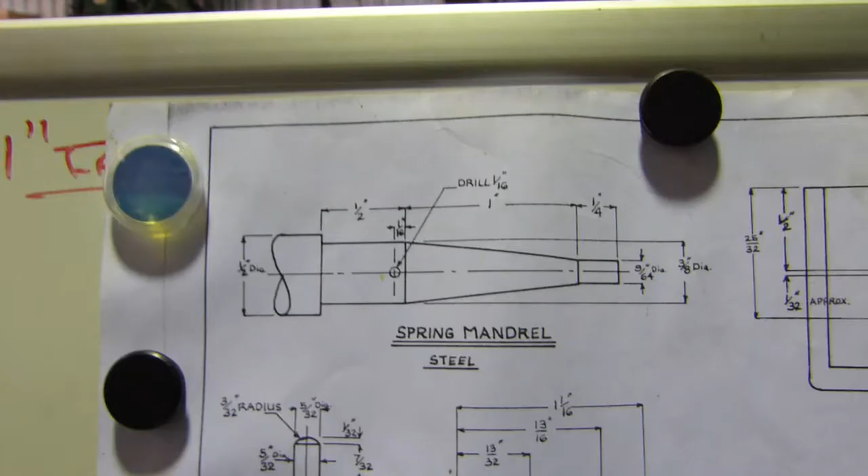Done to the head so far is the valves, so now it comes time to make the valve springs. Now there's the plan for the valve springs.

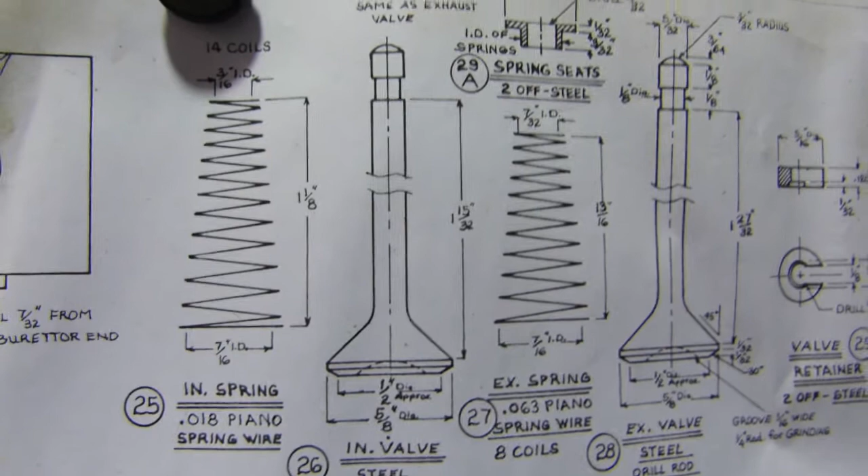They're a tapered spring, the exhaust's tighter than the inlet's. An atmospheric inlet, so the low pressure area in the cylinder pulls the valve open. It doesn't actually have a push rod or a rocker doing it, whereas the exhaust valve has a rocker that actually opens it when we need it to.

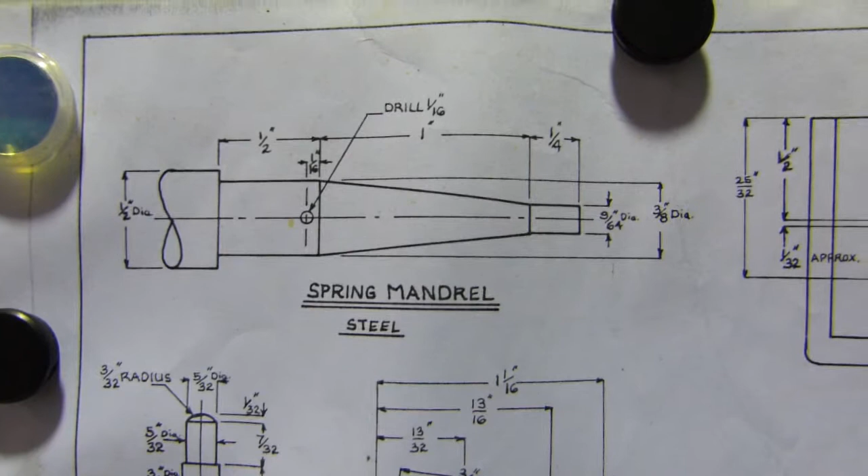So back across here, to get that done, there's a mandrel we need to make. So we're just going to turn the mandrel up, and we'll have a go at that this morning.

Well, this is going to be the mandrel for bending the spring on, or forming the spring. What we're starting with is just a little piece of 1/2 inch bright bar, and we turn it down to 3/8. Then we have a 1 inch long section with a taper that comes down to 9/64. So the whole thing's only about 1 3/4 inches long.

Yeah, it's very small, so I've got the little diamond tool out again for a bit of a laugh. We'll just do a bit of machining and try to get it close to spec.

We'll see how much I can zoom you in and still keep focus. Looking good. So 218. Zero the DRO. So if we go in 9, we should be right on 2.

This is just another little thing, just trying to get it to zeros early and just going for a mark to see if we can hit it.

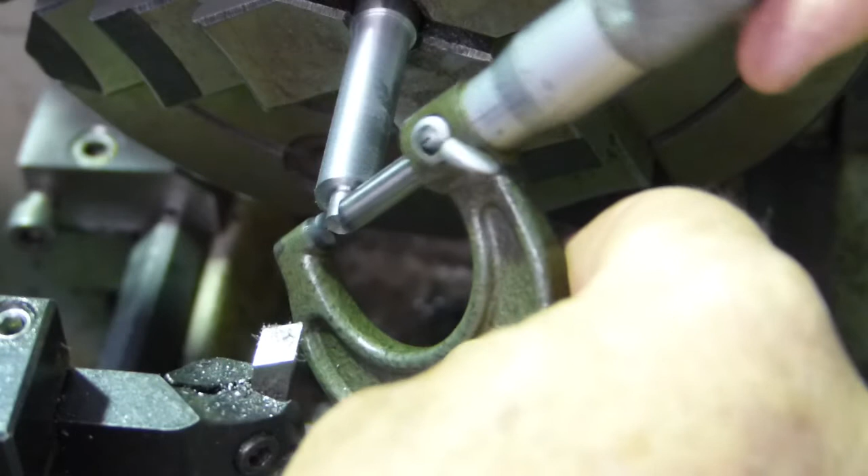Watching Ray from Razorworks, and we were just talking about this the other day. They're just going to hit a mark just for no real reason. Oh, look at that, boys and girls. Anyway, we're right on the money, not that you could bloody see, I could be telling you anything.

Okay, so 60 thou to go. If we go into 1.406, 60 roughly. So we're going to go half of that, nice and gentle though. Actually, we might go the whole hog, bugger it.

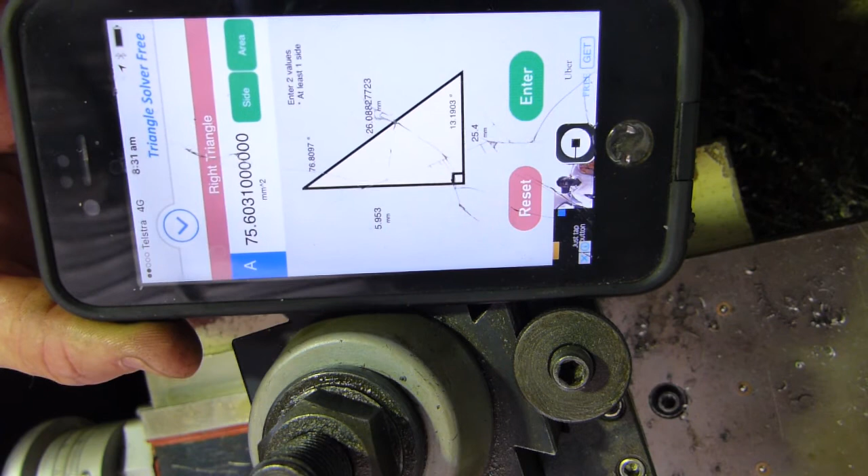Look, I went and done a heap of maths. Well, actually I just popped the figures into my iPhone app. And it tells me that the angle for the taper here should be 13.1903 degrees, and of course the compound on my lathe gives us exact 13 and a bit, so we're going to go with 13 and a bit.

Now with this setup we actually need to run the lathe backwards to try and get that angle. We have enough room that when we go the full length of the cut, we have room up in here, so we're nice and safe to do that.

I've got a little bit of steel there, the main reason's just so you have a background to look at, which I thought it was a bit hard otherwise. So I'll just start doing this. See what you reckon.

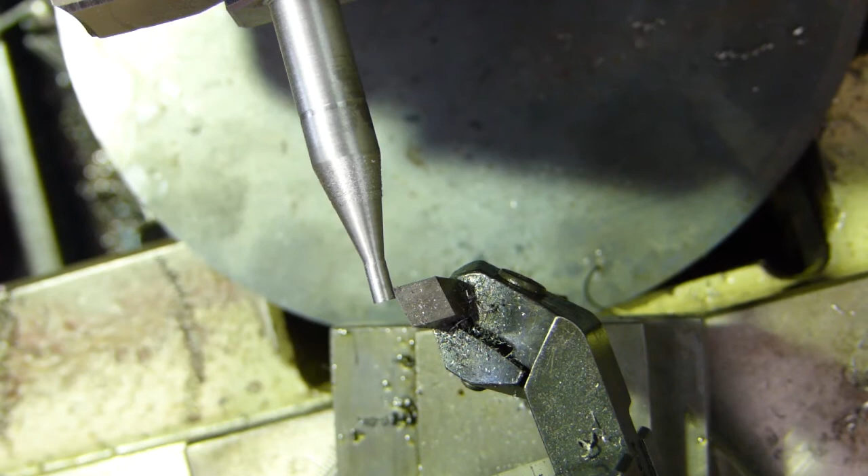Okay, Bozo has been here, Bozo lives here, I think he got a little couch in the corner. But you'll notice this mark here, this little line I put in earlier, that's the length of the taper. When we're down this side equal here, the taper should go right to that mark, and it should actually go past that mark because we're still not at 3/8 there yet.

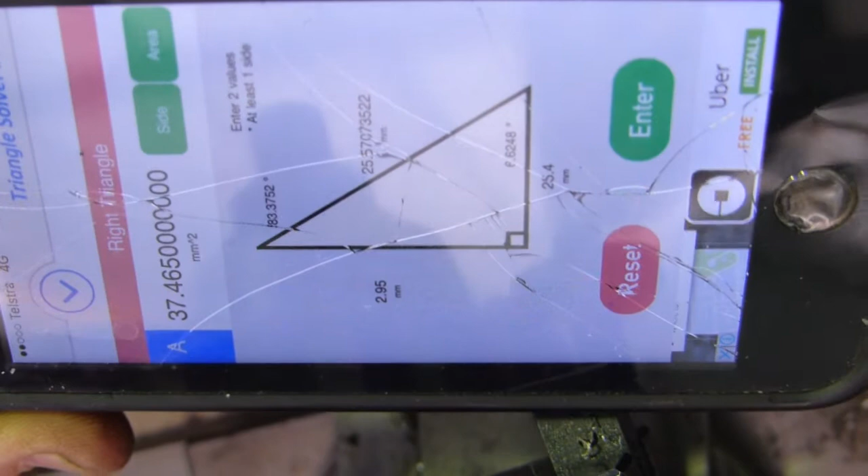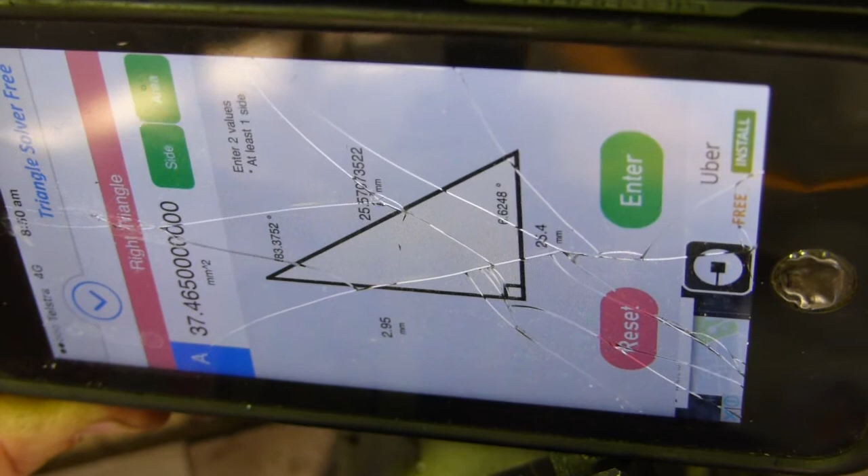So I looked at that and thought, oh, bloody Bozo's been here, I better go check. So my very accurate app, it does work if you put the proper information in. You'll see this little fella here, I actually forgot to halve it, working off the centre. So instead of 13 degrees, that shows me I should have 6.6248 degrees. So on my very accurate lathe, I'll set it exactly to 6.6248 and a bit, or thereabouts, and we'll have another crack. I'll be back in a minute once I've got the compound set.

Okay, I believe I now have the compound set correctly. I told Bozo to piss off and go have a cup of tea, leave me alone for a bit. So that is one advantage of putting in little reference marks to see how you're going. We'll gnaw away at this for a little bit.

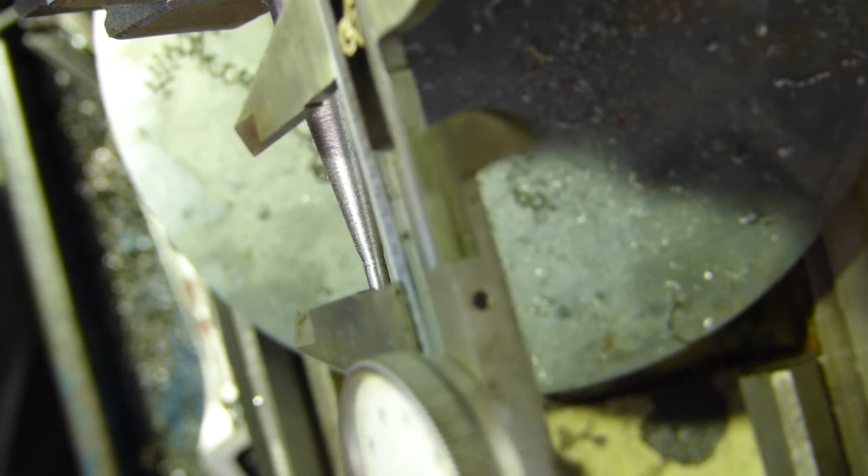Right, that looks a bit more to what we're expecting. I'll try and get this right out of the road for the moment. So when we come up from the end around 1.25 inches, 1.250 thereabouts.

There it is there. So somewhere around there, we should be about 0.375, around 3/8 of an inch. Oh look at that, beautiful. For that rough measurement, it was lovely. Alright, we'll set up and then we'll bring this piece here down to 3/8. I might give that a bit of a polish too, looks a bit rough, doesn't it?

Okay, new camera angle, and now we're going to bring this down to 3/8 along through here. Right, we'll mic this up, see what sort of cut we had there. What do we have? 4.09. Actually, 0.409.

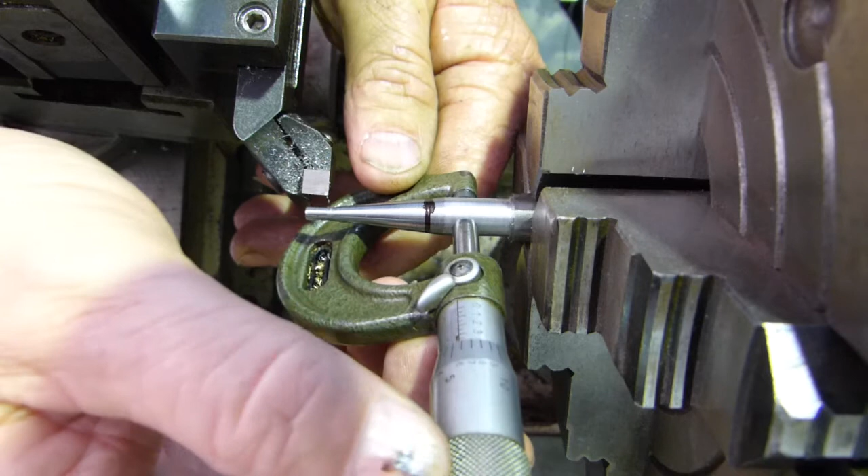We're only a few off there. Beautiful. Okay.

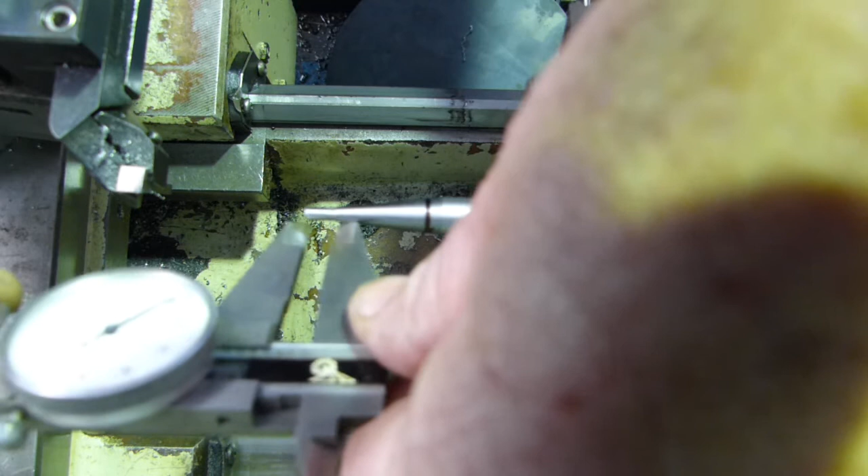Okay, we'll do a few measurements. We're a little bit off the target here. I'll just check how our 1/4 inch was going here. 0.250. Okay, so that's there.

Right, so it's the back end of that line. Then we come 1 inch in. Oh yeah, no, we're better than we thought. The back end of this line to the back end of that line. So look, we're pretty good, better than we thought. My guide lines were just roughies.

So I am happy with that. I'll just check how we're going here. 0.375. Can you see that? I'm getting a lot of light reflection here. I've got a very well lit workshop, but for doing this it's not that good. Okay, so look, we're going okay there, we're about a quarter of a thou too big. We might just do a tidy up cut just for shit and giggles.